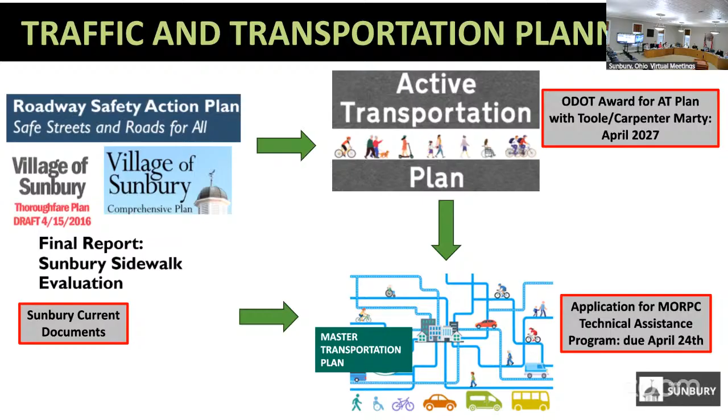So we're going to start with the traffic and transportation planning update. As we've gone through previous meetings, I've touched on a few different components related to our existing traffic and transportation planning documents, active transportation, and briefly master transportation as well. So I wanted to spend a little time putting it all together for the team.

On the left side of this slide, you'll see a couple of snapshots from the different existing documents we have. Essentially, I'm trying to explain that these items are out there. We are not starting from zero when I talk about trying to develop an active transportation plan or update a master transportation plan. We have been doing this in parts and pieces, so I wanted to share some of those items with you.

As you've all heard before, the Safety Action Plan, also known as Safe Streets for All, which we received a grant for, is one of the planning documents we can utilize. We have the Thoroughfare Plan developed in 2016—likely some updates will be needed there, but it's something we'll be able to utilize as well. The Comprehensive Plan is another document we want to update, but we have a starting point for some of this information.

Last but not least, the Sunbury Sidewalk Evaluation—that was done by one of the interns, who walked all of the sidewalks in the city and did an evaluation. As we move forward with our plan, I've already mentioned the Active Transportation Plan, which we received grant funding through ODOT for design consultants. Toole and Carpenter Marty will be assisting the city in developing this plan. So the documents on the left side of the screen are all information that I will be giving to the consultants so they're aware of what we've already developed and how we can build on and update it.

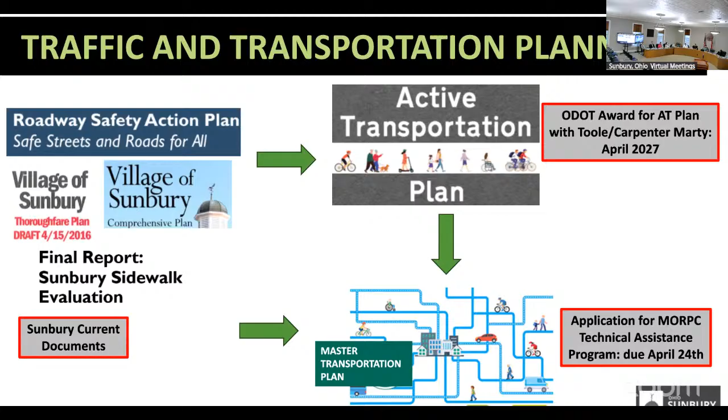On to public outreach. I know on the agenda this list might look a little daunting. I mostly wanted to list out some examples of public outreach and engagement we'll be pursuing in the near future, and talk through some of the efforts we're trying to improve on projects under construction throughout the city. Also, if you're asked about a project in the field, this is where you might find that information. I'm always trying to improve frequently asked questions and public engagement to help residents get comfortable with construction coming their way.

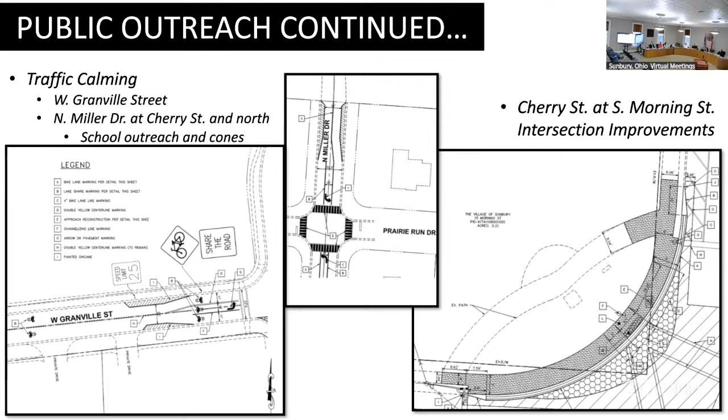I mentioned that we had a dedicated slide to talk a little bit more about the East Granville Street widening project and some of the maintenance of traffic, local versus truck considerations. One of the items we wanted to get some early buy-in on from ODOT and the county was the maintenance of traffic as it relates to trucks. So in order to determine whether or not there would be ODOT permission for us to close down the project, we had to put together a proposed detour plan and some other documentation for a justification for this routing.

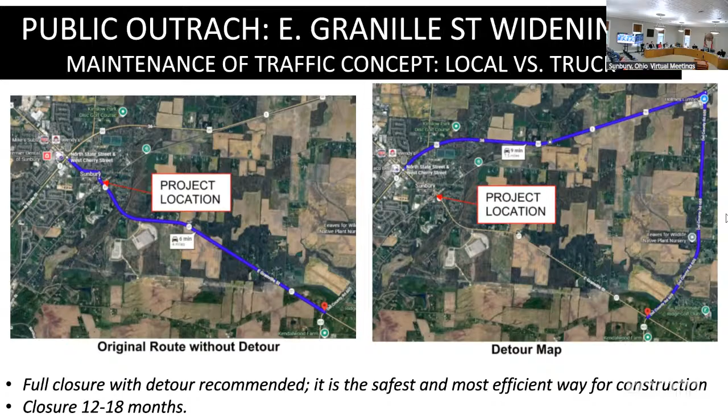Loader purchase. Let me take this one quickly. What Jake had asked me to do is alter his capital improvement plan to replace 3 items that have been approved: a pickup truck, a compact trailer, and a John Deere sidewalk brush, totaling roughly $90,000, with an $88,000 skid steer track loader. A copy is in the packet. He thinks it adds more versatility to the team. He particularly likes that it gives them an opportunity to put matting out in the cemetery before they start digging for burials. There's a lot of damage to the turf as they navigate to and from the burial sites, so this machine would help with forks and additional matting.

Because this is something that's been approved in the city's budget, this would be a budget revision, so we'd come back to you with that. I just wanted you to know that this may be one of the things Dana and I include next time we put together a budget revision. So that's a heads up to swap out some approved equipment for this type of piece of equipment, coming back to you in the form of a budget revision later on. Don't need a decision now, but if you have any initial thoughts, we certainly welcome those.

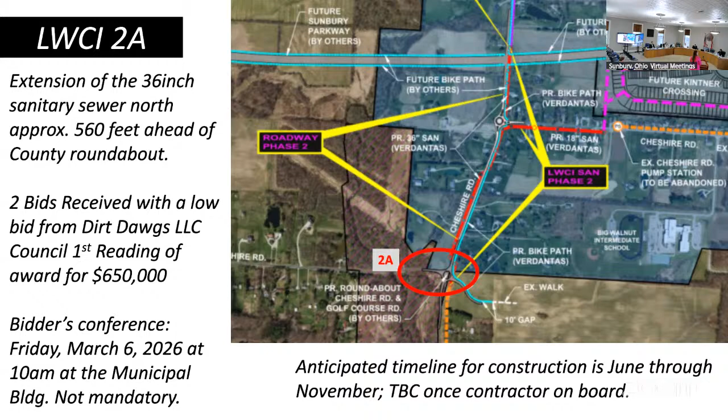Is Columbus Street next? Yeah, the parking lot. So Columbus Street, you guys have seen the mulch is out, some of the plantings. There's still significant mulch work and some landscaping that needs to be completed, but it's looking nice out there. We talked about doing some sort of formal ribbon cutting once it gets cleaned up, which I believe we can probably have finalized in the next 2 to 3 weeks.

Just looking for any sort of guidance on the timeline, but I'm also happy to ask in an email or at council, depending upon who you'd like to be there. When is grass installed? Maybe I missed that. In the next 2 to 3 weeks it'll be installed. So once they have the seeding, you'd be interested in doing a ribbon cutting? Yes. As soon as I get that information, I will see if we can schedule it.

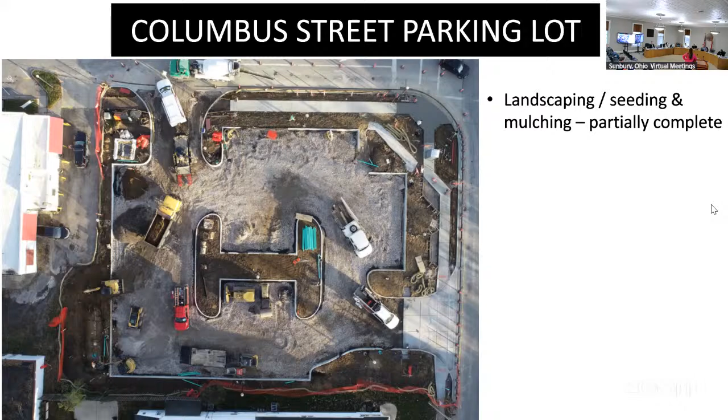Thank you. They started seeding it, yes. Sean was looking, sorry, Mr. Stainer was looking out his window. He saw they were putting grass in today. I believe they had a lot of mulch to do. I'll tighten up the timeline.

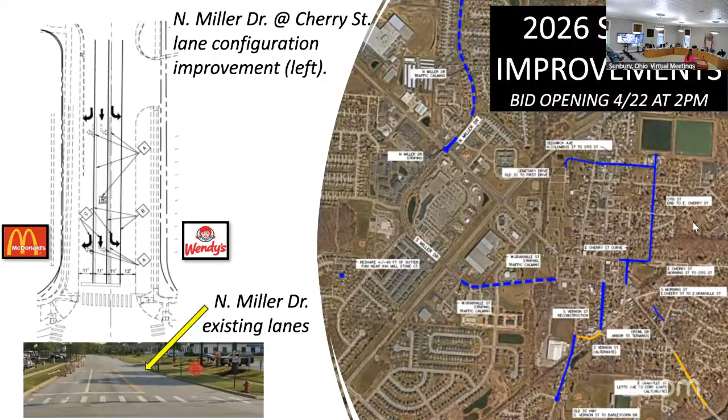Okay, excellent. The street improvement program, the bid opening is on April 22nd at the municipal building at 2 p.m. And no update on the wastewater treatment plant expansion. We're still on schedule.

J.R. Smith Park, they are currently working on the demo. We have had our public works supervisor out as well to help coordinate some of the utilities in the area and address at least one wet spot at J.R. Smith Park that we want to make sure we have a solution for. Right now they are pushing through in order to do some of the mass excavation ahead of the construction. We shared with the Parks Committee that next month we're hopeful to share a little bit more detail about the scheduling of the different components within the park.

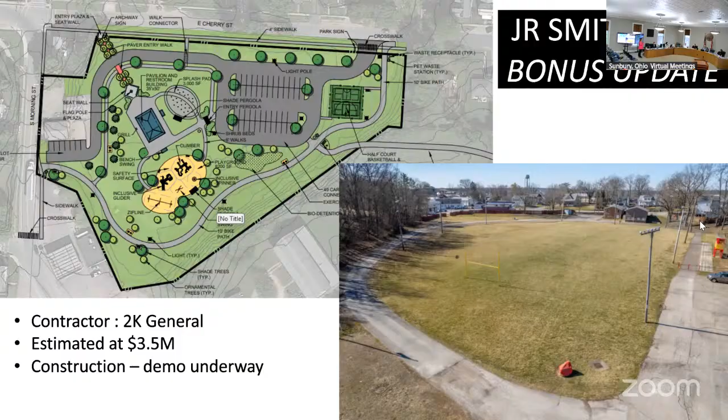And that's it. Any questions?

Excellent, thank you. I don't have any questions, but I definitely wanted to thank you, Carla. I feel like the new format that you've taken with the agenda for the services meeting helps us get through the massive information a little bit quicker and hit some of the repetitive points quicker on the end. So I really appreciate how this is all coming together. Services meetings are drinking from a fire hose sometimes, at least that's what it feels like. So I appreciate being able to hit the highlights and get through it quickly. Thank you, that's great. Thank you, I really appreciate it. And if you see the future action items that could be potential presentation items and you have any feedback or extra projects you'd like me to add, I'm always looking for that input. Thank you, great, thanks Carl.